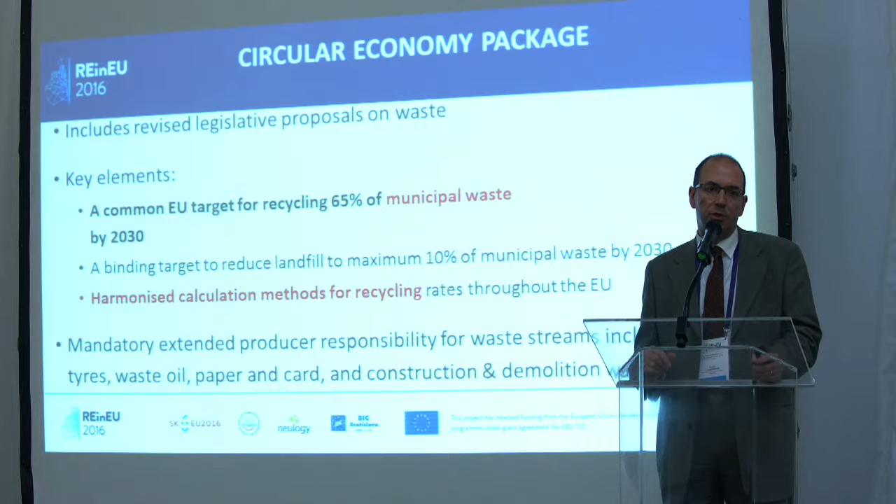Another important point is that there is an extended producer responsibility to make sure that you use your waste in a responsible way. That is relevant if you're talking about industrial symbiosis and use of waste across several industries. So that is the setting, that is the regulatory framework in which we operate.

So we have our raw material, which is limestone. Limestone is decarbonated with a 70% process emissions included, the rest is fuel emissions. We make clinker, and then from clinker they take the last step to cement. And then we add water and aggregates to come to concrete.

Concrete is actually a low carbon product which has about 10 to 15% of cement only. So please make that distinction between cement and concrete. Concrete then contributes to sustainable construction, to houses of today and tomorrow, and to infrastructure needs that are prevalent across the world. So that's a little bit the background of us.

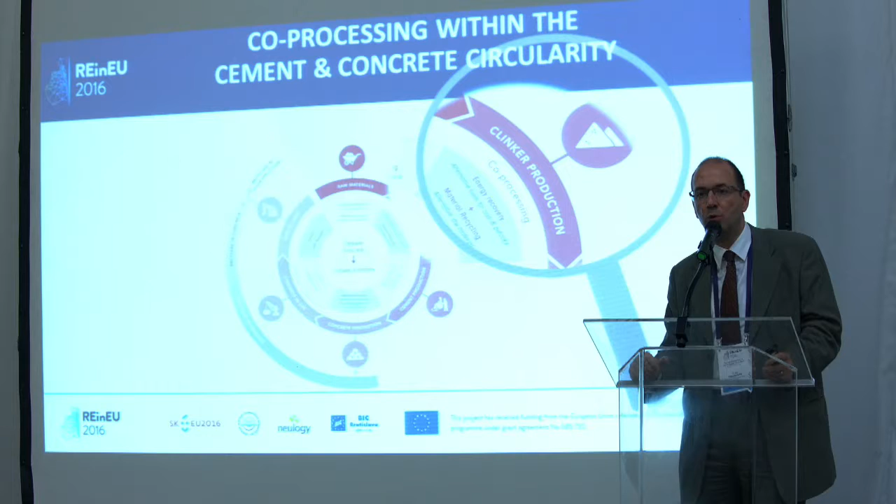What we're talking about today is mainly the clinker production process. As I said before, production of clinker is the part of the cement manufacturing process that is most CO2 intensive, most energy intensive. And that's basically what we're talking about today when we're talking about alternative fuel use.

We call it co-processing. What does it mean? It means that when you are manufacturing clinker in the cement manufacturing process, you normally use primary fuels, which is petcoke, oil, which is responsible for a lot of CO2 emissions in terms of fuels. We try to replace these primary fuels with what we call alternative fuels and alternative raw materials.

Now, how do we do that? Co-processing in the cement industry, and that's an important point I want to mention, is already recognized in guidelines of the European Commission. We're talking about a combination of energy recovery and material recycling. So you see the difference I make between energy recovery and recycling of materials, and that will be important for the rest of my presentation.

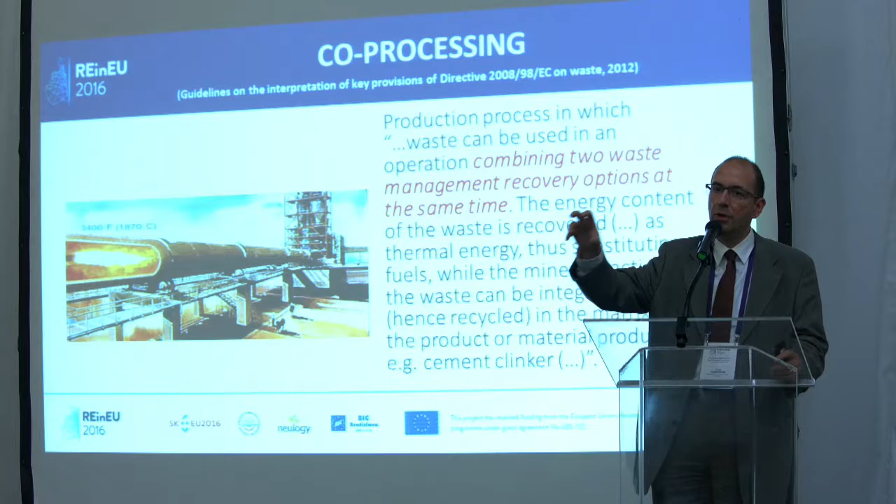But we always emphasize that co-processing in the cement sector means that we use waste from other industries, and we use this waste for both energy recovery and material recycling. This clarifies it a little bit on this slide.

When you look at alternative raw materials, you can have construction products that are used, demolition and construction waste from buildings. Part of the aggregates can be used in the cement sector again. We can use sands, slag from the steel sector, ashes, and we can recycle the material in these products to replace some of our primary raw materials.

The same is true for our alternative fuels. We have paints, we have plastics - you'll see that on the next slide when we go into detail. But the alternative fuels can replace the primary fuels, petcoke, oil, as discussed before. Part of that is also material recycling of some of the products. So you basically have both material recycling and energy recovery in the cement kiln, which means you reduce your recourse to primary raw materials.

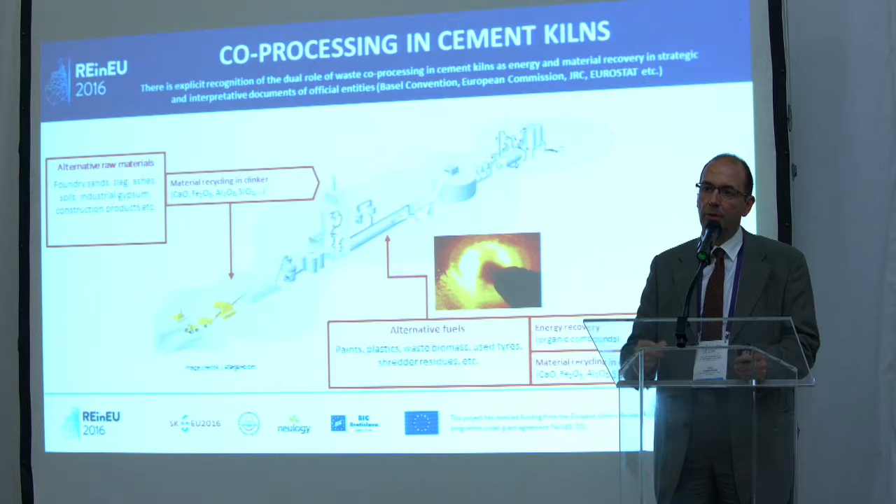So there is the energy efficiency and the resource efficiency more specifically. And in order to do that, you use products and energy from other sectors and other industries. And that's where the industrial symbiosis comes in. That's where the circular economy comes in.

When you look at the breakdown that we have in the cement sector, on the left side of the slide, you see that we still use around 59% of fossil fuels, so that's the primary fuels that we still use. But we have alternative fossil fuels for 36.7% and biomass for 4.3%. So we come at about 41% use of alternative fuels in the cement sector.

If you look at the vision and the way in which we use the alternative fuels, going further into the red part and the green part, you have different sources that we use. We use tires, we use solvents, we use animal waste, we use sewage sludge, impregnated saw dust - all these elements we use from other industries in our industry.

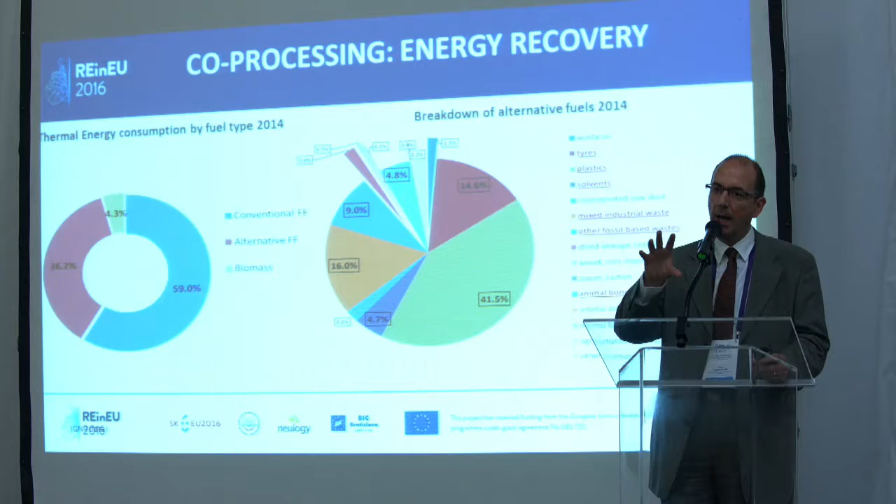Just for your information, when we're talking about biomass, it's about waste biomass - animal bone, animal meal that we use in our processes. That is what we call energy recovery. Remember, I was saying that the cement industry does both energy recovery and material recycling, so here we're talking about energy recovery.

When I'm talking about material recycling, you basically see that in 2014 we used a total of 145 million tons of raw materials, 5 million tons alternative raw materials, and then ashes for 2 million tons. So we have a substitution rate for raw materials of about 4.6%. So raw materials on the one hand, energy recovery on the other hand.

The footnote on that slide is also important because some people might say, but what is then the relationship between the cement industry and the normal incinerators? It's true that we always say there is a market for both, but in fact the cement industry has for a long time not been recognized and acknowledged as one of the potential intake sources for waste. And that's basically what we want to put forward.

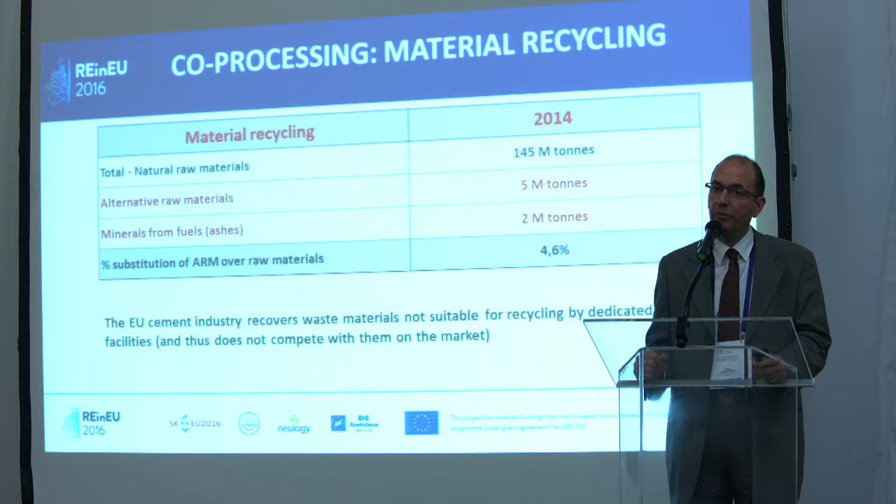When you talk in Europe about building additional incineration capacity, we are saying, well, before you decide that, look a little bit at the potential that is there for the cement sector, because we need these waste streams in order to make sure that we comply with our environmental requirements and with the obligation to reduce our CO2 emissions. I'll go to a few examples.

This is the refuse derived fuel or solid recovered fuel from municipal waste. That is a fuel that is produced when you shred the municipal solid waste. There is 12 million tons of that type of waste, and 5 million tons used by the cement plants. There is 7 million tons used by the incinerators, so waste to energy plants also use that type of waste.

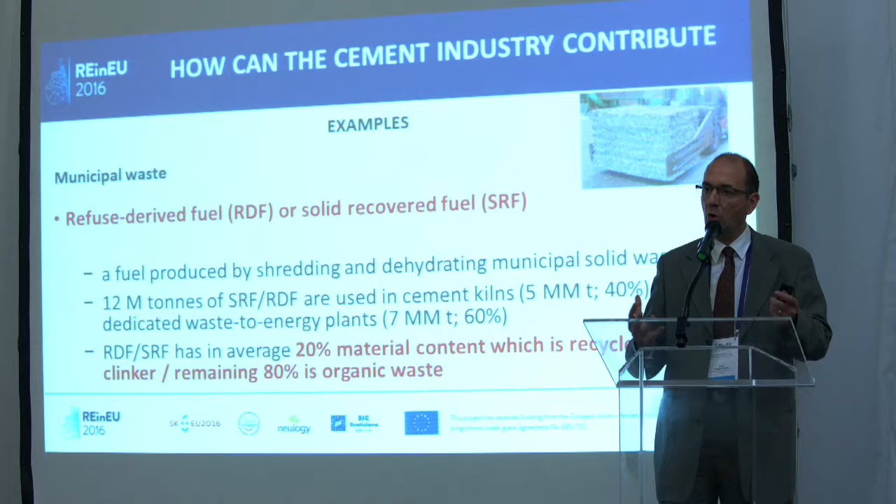That has a 20% material content which is recycled into the clinker. I think the important point there is to say that when we use material recycling, that material that we recycle completely goes into the end product. So we don't have any losses during the process - it is incorporated into the new product. That's where we basically talk about recycling of the product.

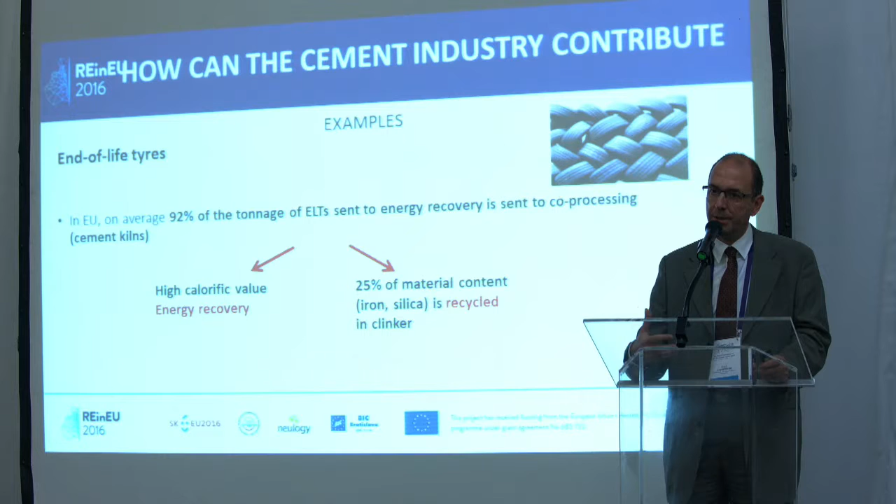Another example that may be closer to your daily activities is end-of-life tires. Around 92% of end-of-life tires are sent to recovery for co-processing in cement plants. That is actually one of the clearest examples of the combination of energy recovery and material recycling. Tires have a high calorific value, so you can recover the energy, and you also have some material content - more specifically iron and silica - that we need in the cement manufacturing process, which is recycled into the clinker. So we have both recovery of energy and material recycling.

We have emphasized this dual nature and dual capacity of co-processing very much because we know that member states in the European Union have an obligation to achieve recycling targets. What we are saying is that the material recycling part in the cement sector should be able to count towards the recycling targets of the member states. That is the discussion we currently have, also with the European Commission and with the member states - how can the material recycling in the cement sector be recognized in the recycling targets at national level? That's a discussion we have.

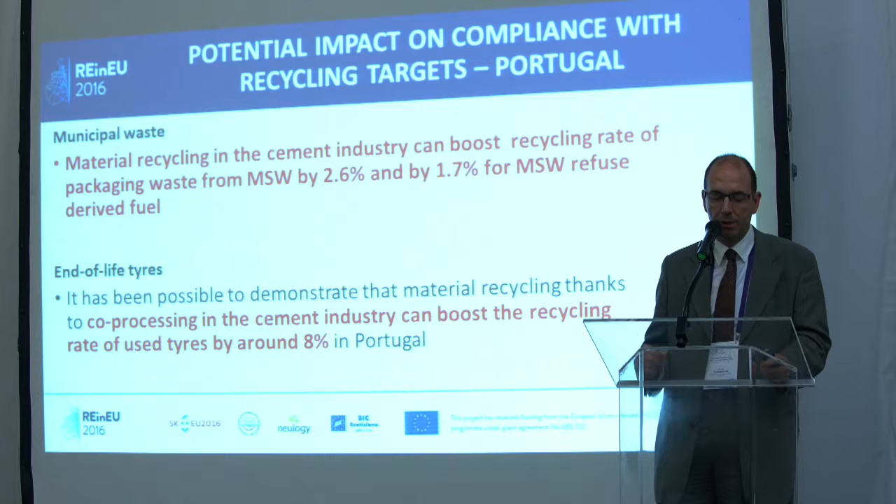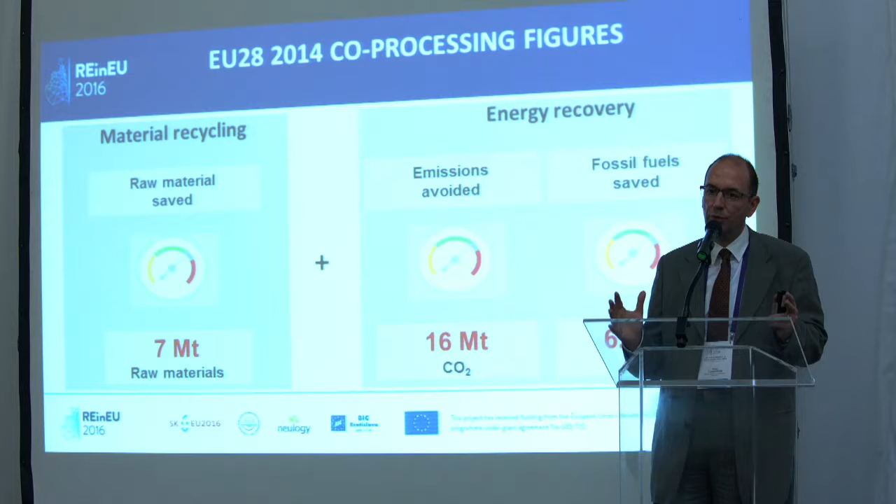You see two examples here on how we can boost the recycling targets. What does it mean for us? As I said before, material recycling means that we save primary raw materials - on an annual basis, we save about 7 million tons of raw materials. When you talk about energy recovery, we save about 6.5 million tons of coal, and we reduce our CO2 emissions by about 16 million tons per year. So that is our contribution to CO2 reduction and to less use of primary fuels.

If I have to end, and that was also a request for this presentation, what are now the policy recommendations that we would have? The first one I already addressed - acknowledge that the cement sector is there, that there is capacity available to take in waste from different waste streams. We have 160 cement kilns across Europe, so make sure this is used for recycling and recovery. What we also advocate for is a landfill ban for recoverable and recyclable waste.

It's clear that's on the agenda of the European Commission. It's not always easy to implement at national level, but landfill ban is high on our agenda because we need access to raw materials, we need access to waste as part of our raw materials.

That's a point in the discussion on the revision of the Waste Framework Directive and in the upcoming communication on waste to energy. So all this to say that we have a place in the circular economy, and there I would like to end my presentation. Thank you very much.

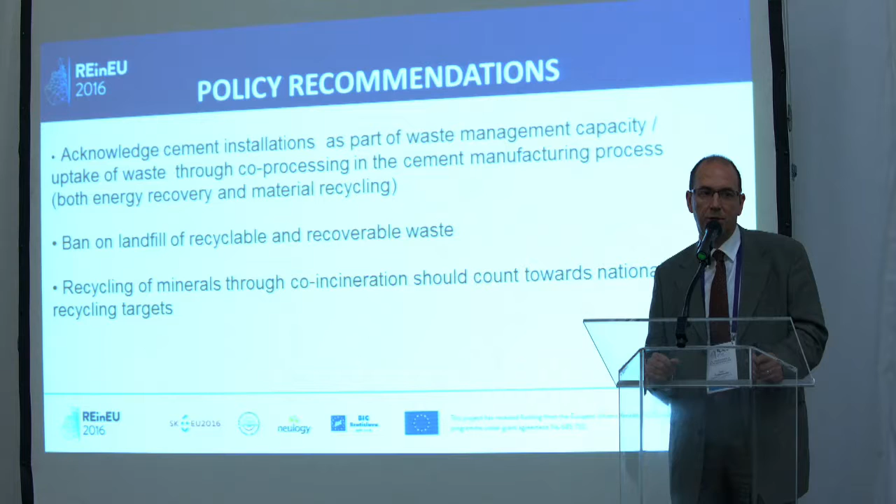Thank you, Koen, a lot for a very good presentation and overview. When waste becomes such an important input, it's also difficult again to define waste after all. Thank you very much.

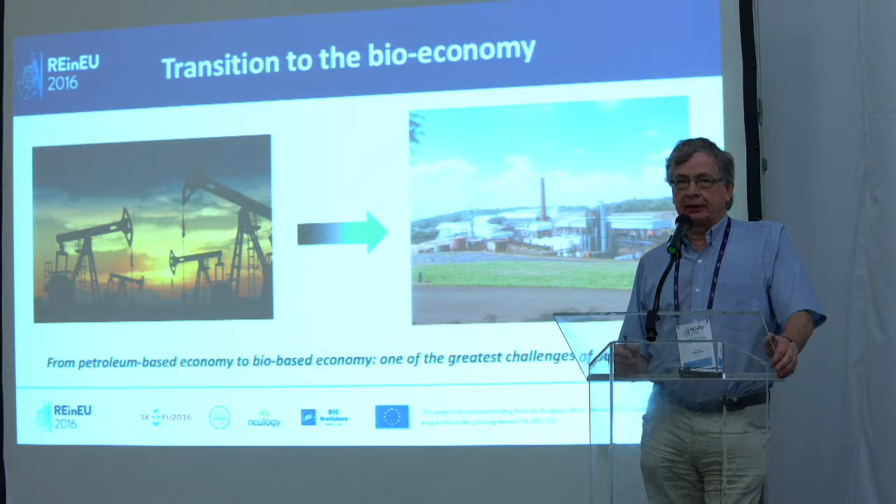Thank you. I would like to thank the organizers for the kind invitation to give this presentation, which will be concerned with the sustainable production of biofuels and bio-based chemicals with microbial cell factories. The transition from a petroleum-based economy to a bio-based economy is one of the greatest challenges of our times.

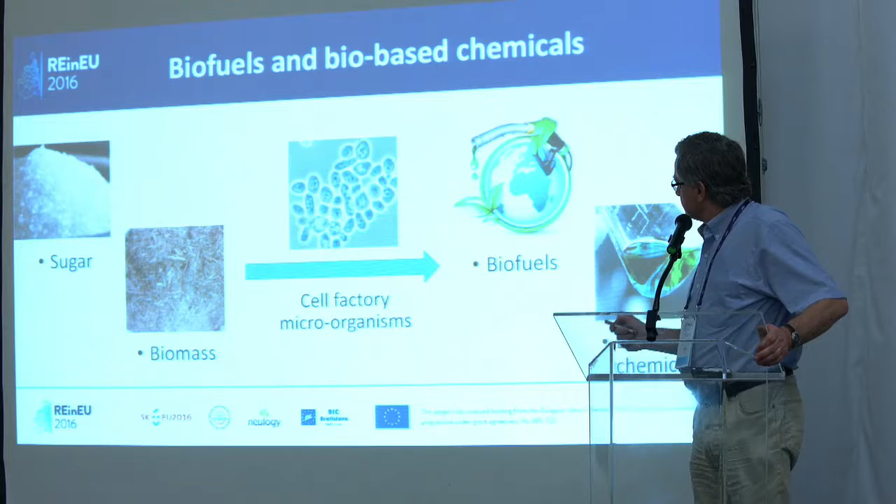To produce biofuels and bio-based chemicals with biomaterials, either sugar or biomass, we need microbial so-called cell factories, microorganisms that can convert with high productivity and high titer the sugary materials into biofuels or bio-based chemicals.

When we look at first generation bioethanol production, which is very active nowadays, we see huge bioethanol production in the United States using corn. In Europe, corn and wheat, but also sugar beets, for instance, are used for bioethanol production. In Brazil, sugarcane juice and molasses.

Molasses is a residue from sugar production. Most ethanol plants in Brazil produce both ethanol and sugar, and molasses is used for bioethanol production on a very large scale. In quite a few other countries, molasses, the residue of sugar production, is also used for first-generation bioethanol production. Other materials include cassava, and there are quite a few other foodstuffs used for bioethanol production.

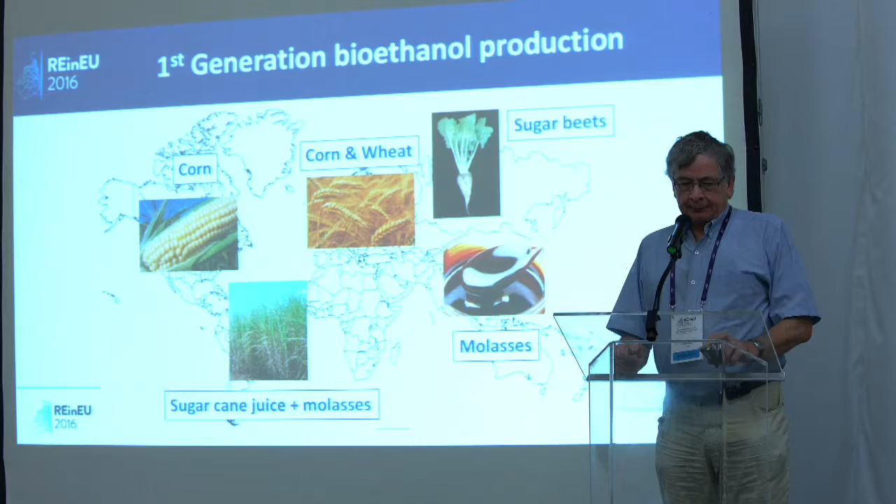But it would be much better if we could use so-called second-generation substrates for bioethanol production, either waste streams such as forest residues in northern areas, corn cob and corn stover, recycled paper, wheat straw, bagasse. Bagasse is the woody residue from sugarcane, available in huge quantities in Brazil. There are also empty fruit bunches from palm oil cultivation, and bioenergy crops, which are crops especially cultivated for biofuel production, though not yet at commercial scale.

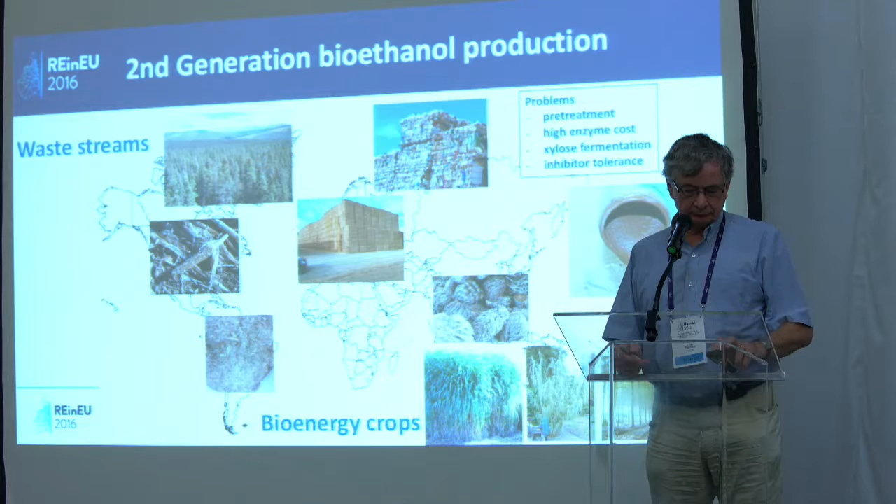In the FP7 NEMO project, we constructed the first industrial yeast strain with high xylose fermentation capacity and very high inhibitor tolerance, which could convert both glucose and xylose sugar in lignocellulose hydrolysate with high productivity into ethanol.

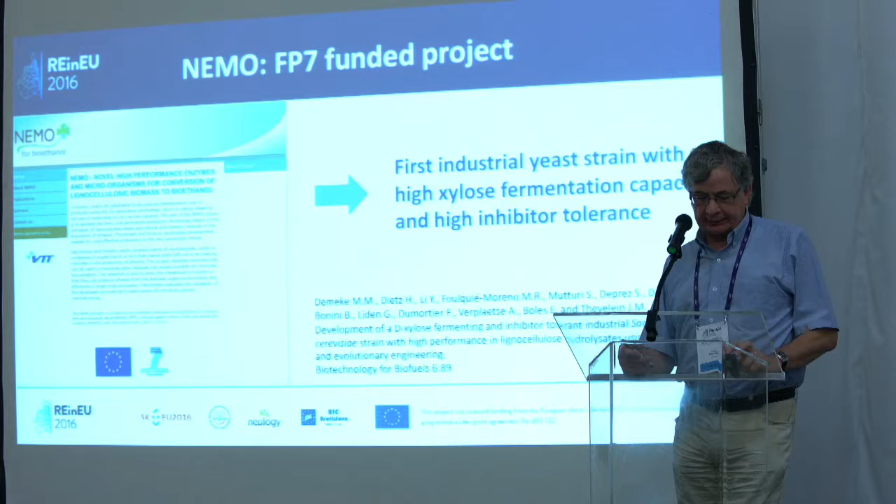Nowadays there are several of these so-called cellulosic yeast strains available, and we have moved from the demonstration stage into the industrial, commercial stage, where we have about 6 large-scale commercial bioethanol plants using second-generation substrates.

The first one was built in Italy, in Crescentino. Then there are 3 plants built in the United States, in Dakota, Kansas, and Iowa. And there are 2 plants in Brazil that work with bagasse, both of them. These plants are not as large as the first-generation plants, but still have capacities of about 100 million liters of ethanol per year, which is about 50% of a first-generation ethanol plant.

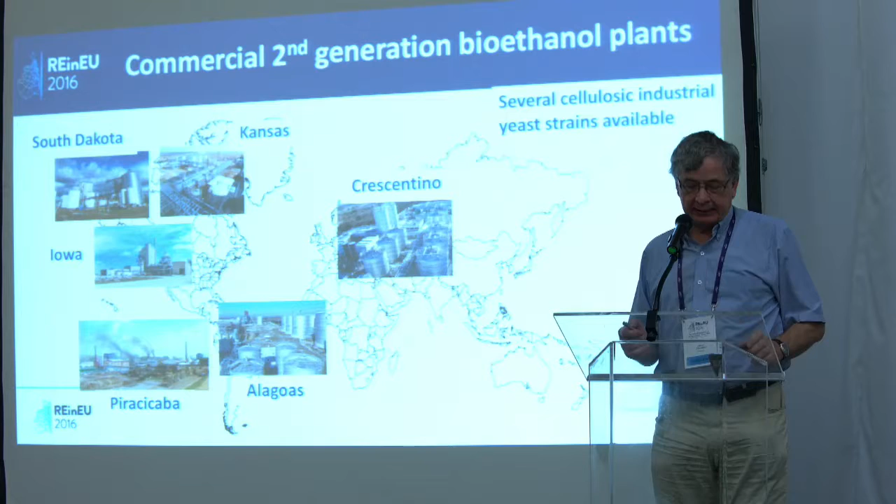With respect to current developments, two striking developments we see nowadays: plants like to combine first generation with second generation bioethanol production. For instance, in Brazil, sugarcane is used in most plants to produce both sugar and ethanol. The sugar production also results in molasses, the residue of sugar production, and bagasse is the woody material that remains from the sugarcane.

The bagasse is generally burned to produce electricity, but there's a large surplus of bagasse, so it's used for second generation bioethanol production. But as I told you, the lignocellulose hydrolysate has very high levels of inhibitors, which makes it difficult to obtain the required titer of ethanol and the required productivity.

That's actually why nowadays the plants mix molasses together with the bagasse. Molasses also has high inhibitor levels, but the inhibitors are different from those in the lignocellulose hydrolysate. So when you mix the two, you actually dilute the inhibitors from the two substrates. This gives rise to very profitable ethanol production, like the one in Piracicaba of Raízen, which is the most profitable second generation bioethanol production nowadays.

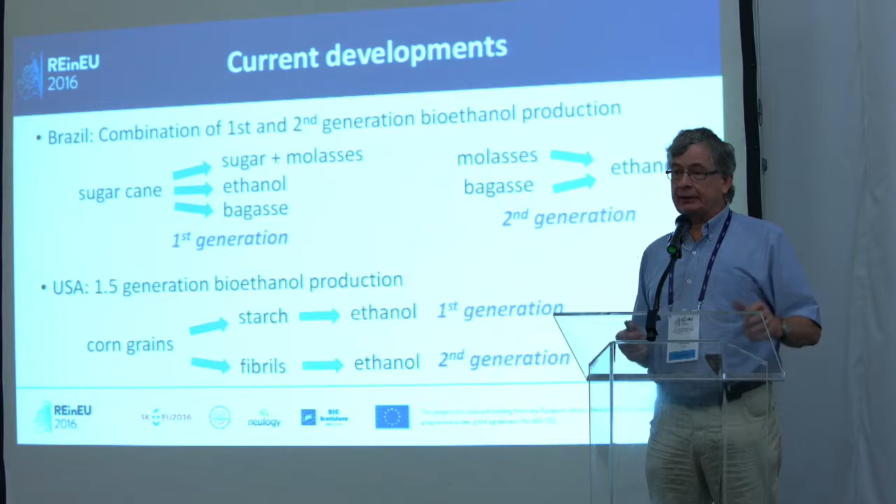Obviously this is quite profitable for the plants because, for instance, the distillation of the ethanol, which is quite expensive, can be used for both processes, first and second generation.

But all these plants suffer from children, or baby, problems. One of them, maybe rather unexpected, is the pre-treatment of the biomass. With a steam explosion, for instance, not only does it explode the lignocellulose material, but apparently also the equipment. It's highly corrosive, damaging to the equipment, so new pre-treatment methodologies have to be developed in order to make this really feasible at a commercial scale.

The enzyme cost: enzymes are used to hydrolyze the lignocellulose polymers into free sugars that the yeast can convert into ethanol. The enzyme cost is still about 20% of the ethanol cost, which is, of course, high.

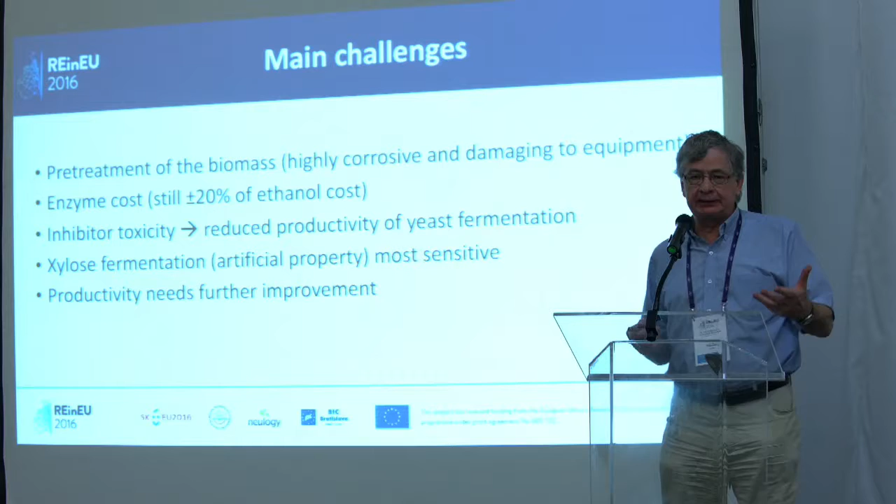The inhibitor toxicity is still an issue and reduces the productivity of the yeast fermentation, and thus also the productivity of the whole ethanol plant. What is quite striking is that the artificial property we have engineered into the yeast, being able to convert xylose into ethanol, is most sensitive to the inhibitors and stressful conditions in the plants and in the process. So the productivity needs further improvement.

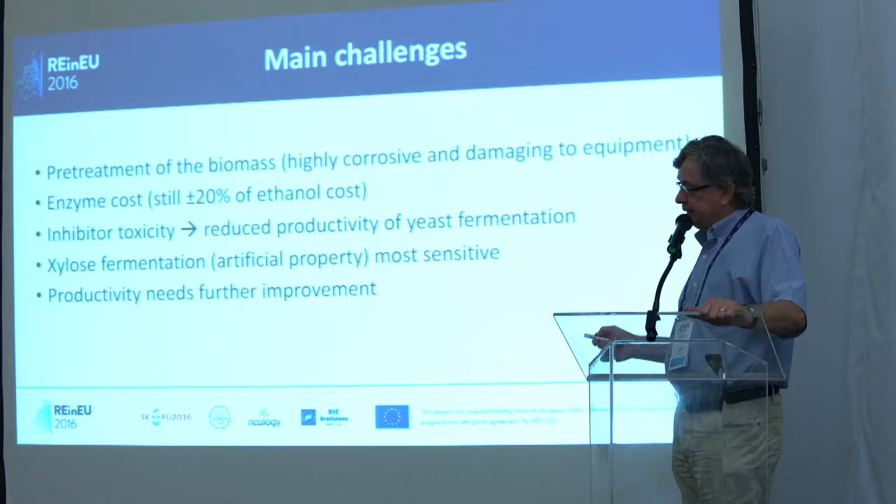With respect to bio-based chemicals, these are nowadays produced from sugar, also by cell factory microorganisms that have been engineered to produce these chemicals in high titers and high quantities. One of the easiest is lactic acid. Lactic acid is already produced by engineered yeast, rather than ethanol, and has been done commercially for more than 10-15 years. The lactic acid is used to make bioplastic, biodegradable plastic.

Also, succinic acid production has been realized with yeast - commercial production in large quantities of succinic acid, which can also be polymerized into biodegradable plastic.

Another alcohol, isobutanol, is a longer alcohol than ethanol, has a higher energy content, can be used to make jet biofuel, and also can be used as a platform chemical to make many other valuable chemicals for the chemical industry.

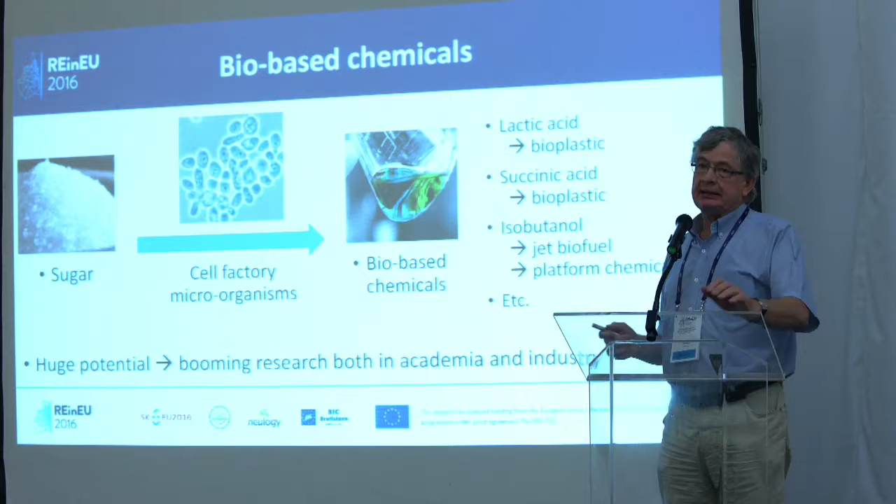This field of producing bio-based chemicals with cell factory microorganisms is actually booming. Both in academic research and in industry, there's a lot of work and development ongoing because everybody sees there's a huge potential in this industry.

But the challenges are also great. I mean, lactic acid was quite easy. Succinic acid is not so difficult. Isobutanol is already a little bit more difficult.

But the novel products that companies want to make require highly challenging metabolic engineering. The control and regulation of many metabolic pathways is not well understood, which makes it difficult to make cell factory organisms with high productivity and a high required product titer.

Many products that companies want to make are actually toxic for the microorganism. This is also true for ethanol, which is toxic to yeast, but lactic acid, succinic acid, and isobutanol are very toxic. The toxicity of these products is a big problem in cell-factory production.

Another issue is the stress tolerance of the microorganism. These microorganisms require a lot of metabolic engineering, which makes them weak. These artificial cell-factory organisms are much weaker than the natural microorganisms that come from nature into the system. That means there's a lot of problems with bacterial contamination in non-sterile large-scale production, because you cannot make biofuels or bio-based chemicals in large quantities in sterile conditions.

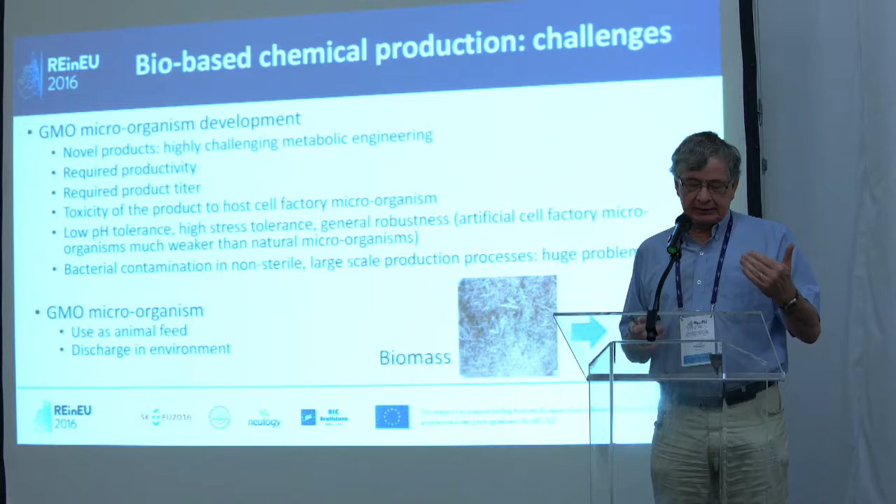As for bioethanol, it would be very nice if we could produce bio-based chemicals using biomass rather than pure sugar. But this is even more difficult, and especially the downstream processing, the isolation and purification of the bio-based chemicals from these lignocellulose hydrolysates, is a very challenging task.

Suggestions for policymakers: what we definitely need is more basic research on these cell-factory microorganisms, on how the metabolic pathways are regulated. We know the pathways, but how they are controlled and regulated is something where we have too little knowledge. Improvement of stress tolerance in these microorganisms is really crucial.

I'll give an example of what we would like to do: transfer stress tolerance traits from one species to another. It's quite striking if you look at yeast species. We all know Saccharomyces cerevisiae is the yeast that produces ethanol, but there are many other closely related yeast species.

Kluyveromyces marxianus has a very high thermotolerance, much higher than Saccharomyces cerevisiae. Zygosaccharomyces bailii has a very high acetic acid tolerance, much higher than Saccharomyces cerevisiae, and acetic acid is one of the main toxic inhibitors in lignocellulose hydrolysates. Zygosaccharomyces rouxii has a much higher osmotolerance.

So if we could find out why these closely related species actually have these very interesting, attractive traits, and transfer them to the Saccharomyces cerevisiae yeast used to make ethanol, that would be very, very interesting.

Another suggestion is that we need more support for the transfer of lab-scale results to pilot-scale conditions. Another important issue is the GMO situation.

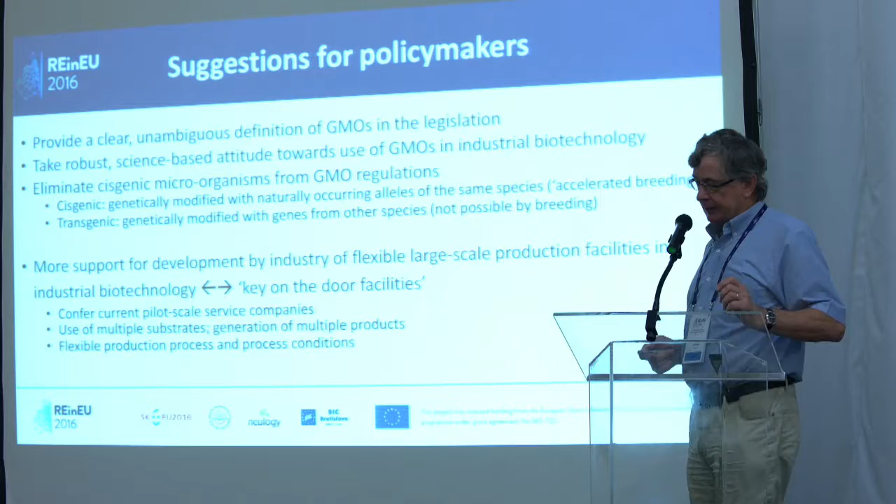What I think we also need is more support for the development by industry of flexible large-scale production facilities in industrial biotechnology, rather than the turn-key facilities that we have now. Similar to the pilot-scale service companies, which are much more flexible in the use of multiple substrates, generation of multiple products, and flexible production process and process conditions.

And then finally, my personal commitment in this story is that indeed I'm a professor at the University of Leuven and department director of the VIB, but I'm also the scientific founder of a startup company.

Global Yeast is a Brazilian-Belgian startup company financed by Brazilian and Belgian VC funds, with headquarters in Rio de Janeiro for business development and very good connections to the Brazilian bioethanol industry. The research and development site is in my laboratory now, but we will move next year to the bioincubator. The mission of the company is to develop superior industrial yeast strains for the production of bioethanol with first and second generation substrates, and the production also of bio-based chemicals. We have in total now 14 people in the company. Finally, I'd like to thank you for your attention.

Thank you very much, Johan. It's interesting to see that you have one leg in a very fast-moving research field and another one in an industry that depends on bulk and high investment costs, where you may have 20 years of repayment before a successful manufacturing. So when do you take on board the new technology and build a new factory? So when do we have the circular economy?

Okay, next speaker now. I would like to present Dr. Witold Kawalek, who is a mathematician and mining engineer, and lecturer and research worker in the Faculty of Geoengineering, Mining and Geology at the Wrocław University of Science and Technology in Poland. Your main fields of interest are mathematical modeling of systems for the mining industry, and you also write something I never heard before. I heard about fuzzy logic, but here you write that you like to use fuzzy numbers. So let's see if we see any fuzzy numbers in your presentation. Okay, please. Thank you.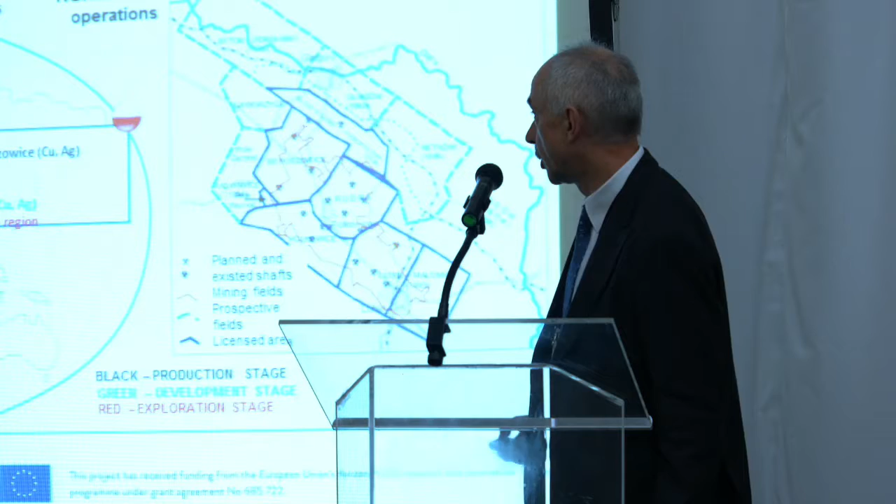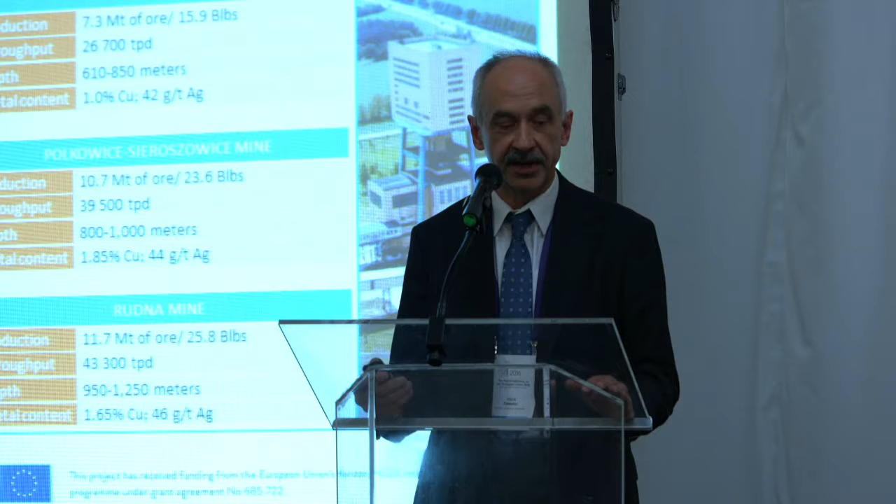So, a large company. Some key facts - you can read several numbers that prove it is really a big company. Number of staff, really deep mines, difficult geology, means that mining there is difficult, and also processing of the ore is difficult. What is very important, this is a giant energy consumer - 2.6 terawatt hours per annum, meaning up to 2% of the total electric energy consumption of Poland. So it is a giant energy consumer. Any reduction of this means a lot of energy saved.

Some few words about the mining technology, because probably you are not aware of this. You can see a map of mining developments, belt conveyors, large lines of belt conveyors that transport copper ore. The copper is blasted, then transported by cars, by trucks, to belt conveyors, then to the shafts up and processed. And as you can see, the ore is delivered in big lumps.

Those lumps have to be crushed, then milled. Here you can see fine particles that are flotated. However, these three processes depend on the ore that is supplied to the processing plant, and various types of ore require a little bit different activities, different settings of those machines. It would be better for the processing plant to look exactly what ore is being supplied to them.

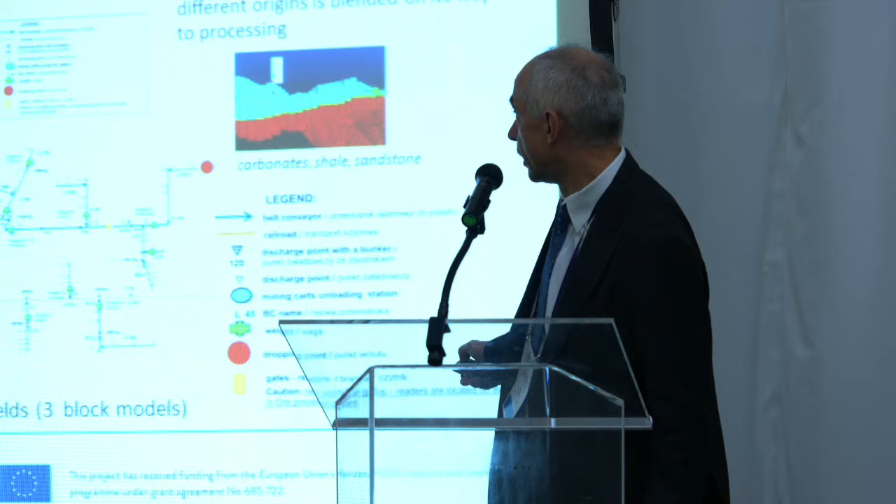However, as you can see, it is not easy, because the general lithology of ore contains carbonates, shale, and sandstone, and changes from one mining field to another, those digital blocks show the differences. This material, even known in the mining field, being loaded on a conveyor belt, is then mixed or blended with another material, and finally there is a mixture difficult to be distinguished. This is the input of the DESIRE project, as mentioned before.

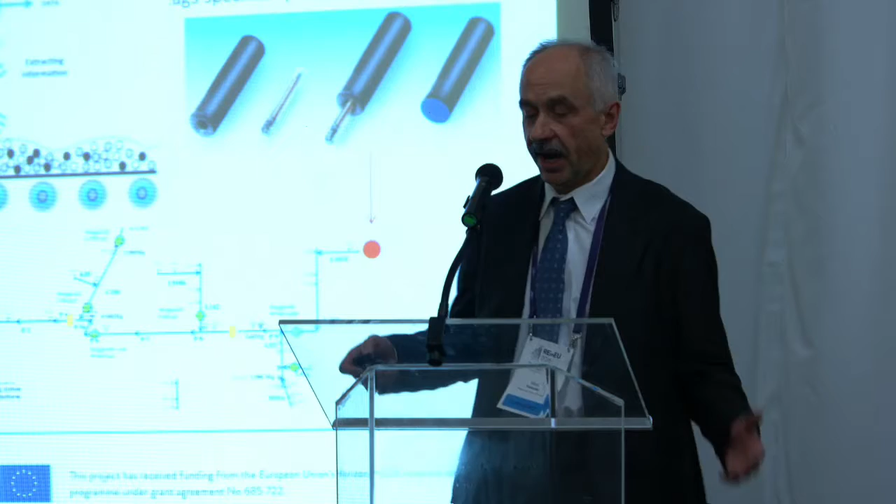Why not add information to the raw material stream in such a way that this stream can say something about itself? If we put small tags or sensors onto the stream, at the place where the ore is loaded, then after transport those tags can be read, information from them recalculated, and we should know something more. The technology is provided by the DESIRE partners to KGHM, the special tags, the readers, and obviously it can work only if we have...

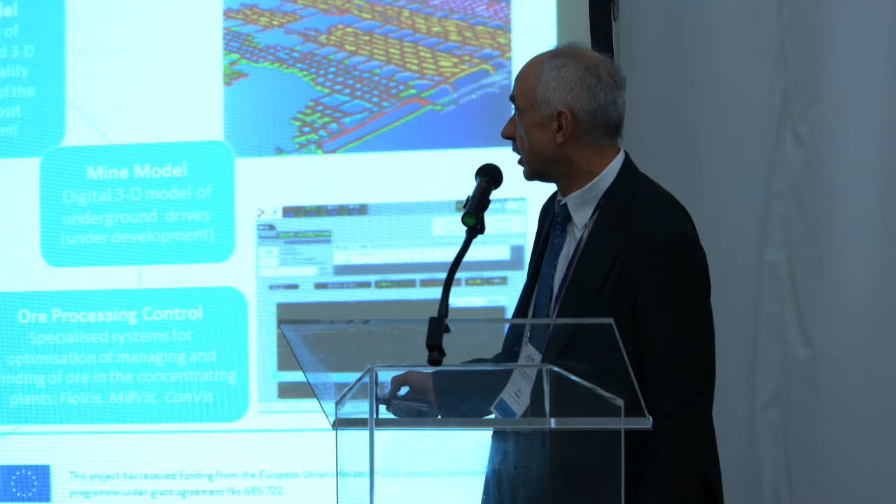Sufficient information communication technology environment, and there is in KGHM a digital ore body model, a mine plan, which provides information about the consecutive mine advances, the mine model, which numbers and identifies places from where the ore is being mined, belt conveyor control, which gives information about the running of conveyors, and this information, taken together and processed, should provide the ore processing control with more accurate data about the ore being delivered there.

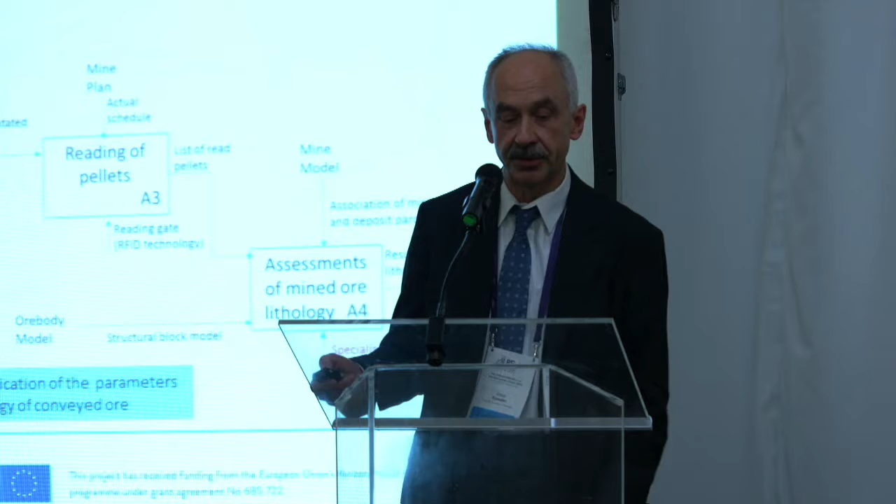The workflow of the proposed and being developed DESIRE process analyzer technology solution: from preparing the pellets or sensors, annotating them, then after transport reading and processing the information to get the results. Again, the valuable input of DESIRE partners is processing of big data. Cloud computing is used for this.

Sorry, can you run this?

Here you can see the simulation model of flow of material. The small X which arrives on the conveyor belt represents the tag or sensor which was put in at the loading point and then transported with the ore up to the shaft. Here you can see how the bulk material behaves in the ore bunkers, for instance here. So you can see that blending is not very easy.

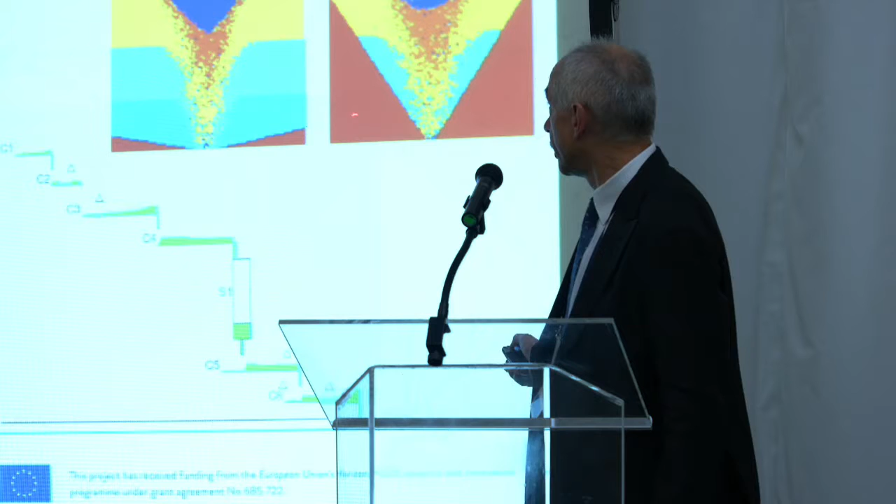These simulation models I used for supplying the assessment. So this was about getting the knowledge of the material, but the large belt conveyor system also consumes a lot of energy, and the energy can also be saved.

There are some SCADA systems already implemented in KGHM, a lot of sensors that get information from machinery equipment, and if this information is taken, the diagnostic signals, taken, smoothed and read properly, they provide information about a fault which can cause a breakdown. After repair, the diagnostic signal goes back to the proper stage.

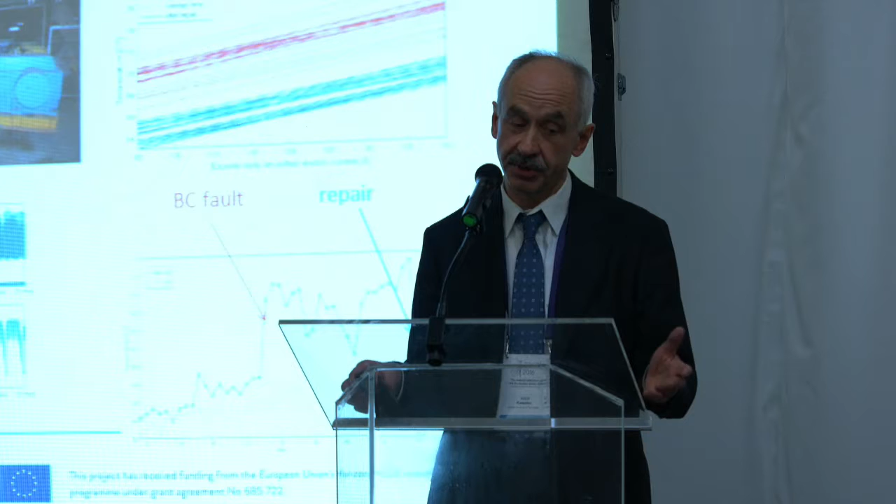Here you can see the signals from good, bad and repaired machinery. All this leads us to condition-based versus the previous resource-driven maintenance, decreasing breakdown time, decreasing idle work of conveyors.

Which obviously means only wasting energy. Another solution to the belt conveyor system is replacement of energy-consuming elements like belts and idlers with more efficient ones.

This is the old solution, modernized. And this is the output, so you can see this is the comparison of resistance to motion, which means consumed energy. Tests were made in situ in the underground mine in very tough conditions, which are really difficult to operate in.

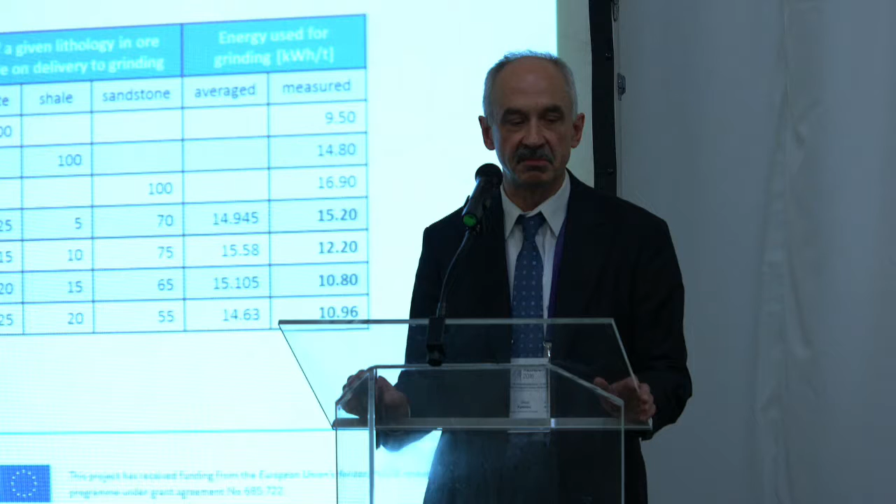Next impact, maybe even more important: not only can we save energy, but also while supplying the processing plant with recognized ore, and better tuning the ore beneficiation processes like grinding, milling, and flotation, we can increase metal recovery. So it means we can get more from the natural resources.

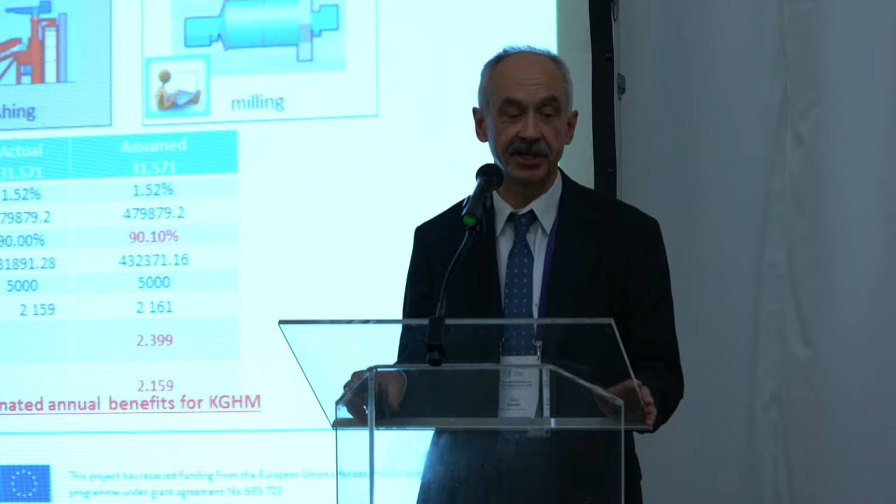Also a very conservative estimation tells that even increasing the recovery from 90 to 90.1% gives more than 2 million euros in value of metal earned by KGHM, but it also means tons of copper supplied to the industry instead of being poured onto the tailing pond.

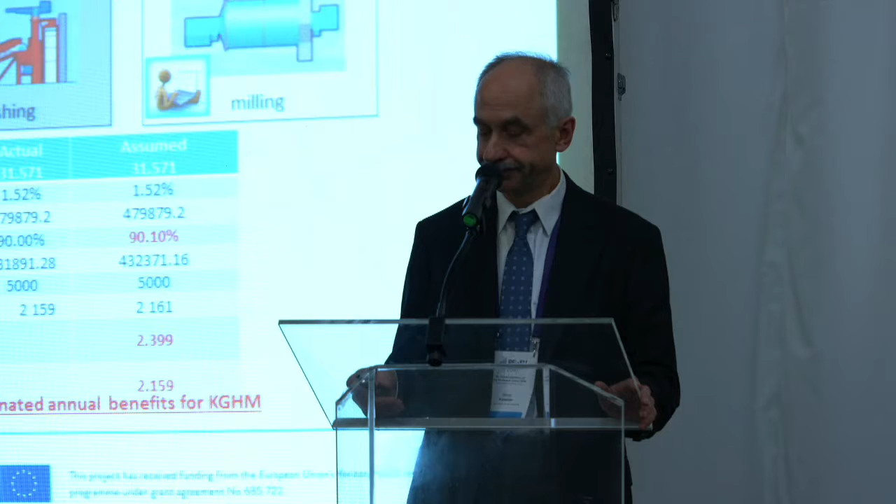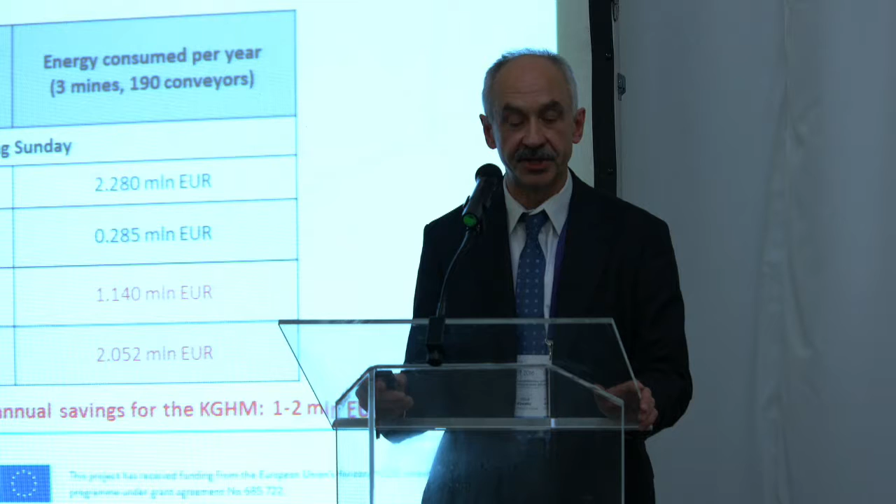Large belt conveyor transportation systems can also save energy by avoiding idle time, as was taught, and also by the replacement of standard equipment into more energy efficient equipment. Just looking at one branch of a single mine, if we replace the old belts and idlers with new ones, taking into account the output and average number of hours, we can save a big amount of energy and money spent on energy. This is for this transportation branch only, and for the whole KGHM, here are the potential savings.

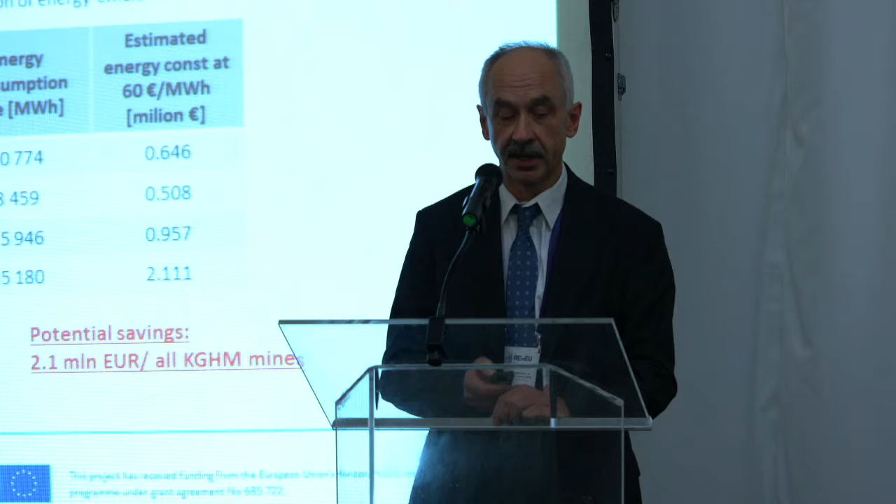This project is being run now. What is at the moment being done is cloud-based big data processing of data streams. In situ experiments are being prepared and will soon start. A comprehensive workflow procedure takes information from several already existing systems and adds some new ones to provide information on the copper ore. The algorithms for efficiency estimation and fault detection are under development, but some of them have already been developed, checked against standard policy, and proved to be successful.

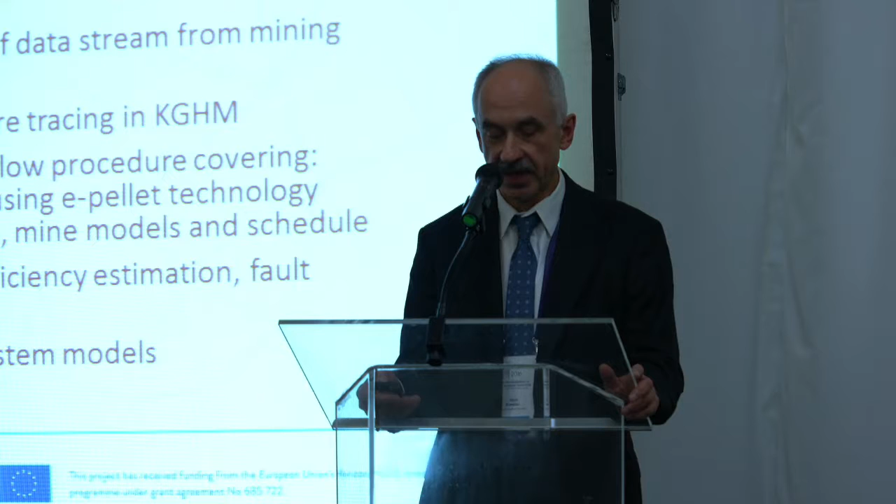Closing remarks. These presented results, achieved and expected, have been possible due to the DISIRE project, which helped the non-ferrous industry in Poland to be supplied with solutions already developed in Sweden, Italy and Israel, with specialists working together. There is strong cooperation between the partners in the project. The project should finish with proposals tested in industrial conditions. Obviously, next steps depend on the company, but there is a visible successful solution for the company to reduce energy consumption and increase metal recovery. Thank you.

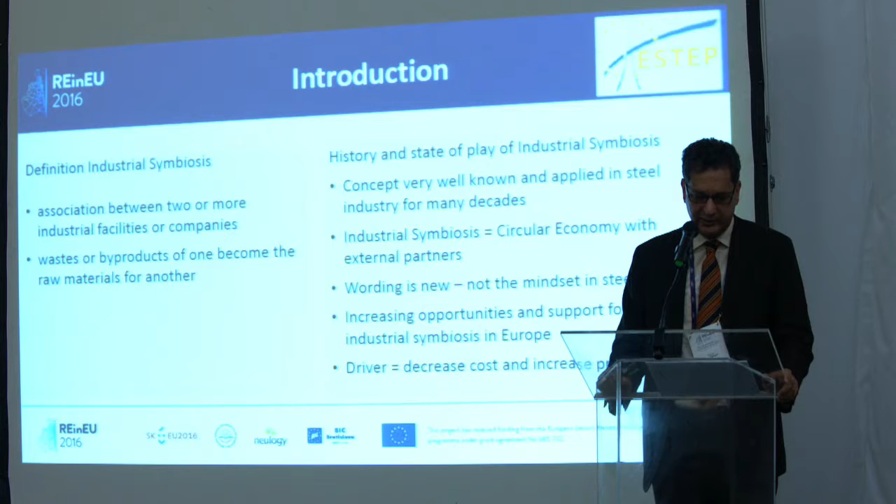Okay, back to the topic: industrial symbiosis. The basic definition, as we understand it, is basically an association between two facilities or two companies or two industries, where the waste or byproduct from one could be of use to another. This concept is very well known within the steel industry. It gives us a number of opportunities. Basically, we recycle most of the process, and we'll see in the follow-on slides.

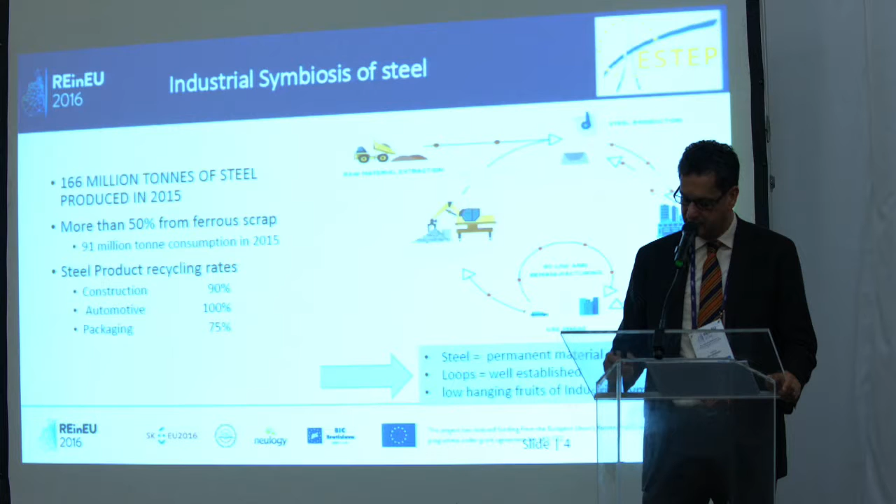The loop is well established, but we're still working on how we can make more use of the scrap and not just take it back into the chain.

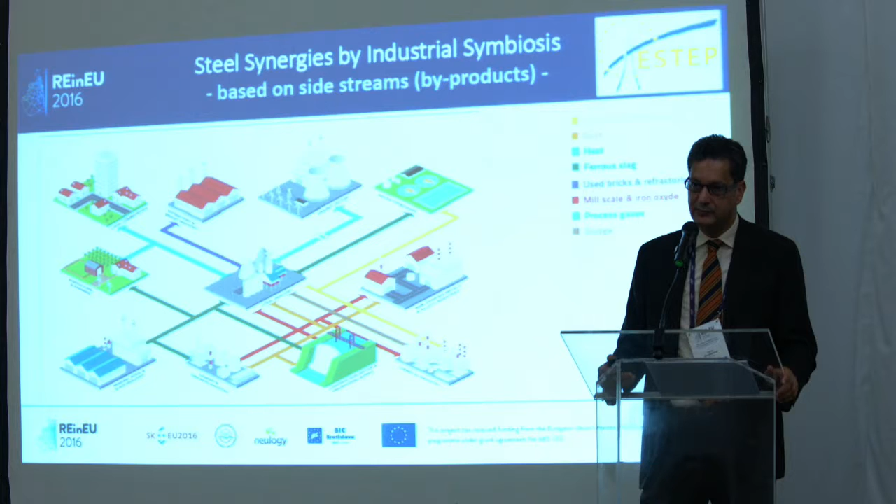As we can see in this figure, the steel industry is at the heart of other industries. Basically, we feed all the byproducts to other industries - could be water treatment, construction, cement - and it's very well linked. It depends on the industry: some you can get only one byproduct, others you might get a combination, maybe two or even three. So the key point is it's well linked with other industries. That's on a high level.

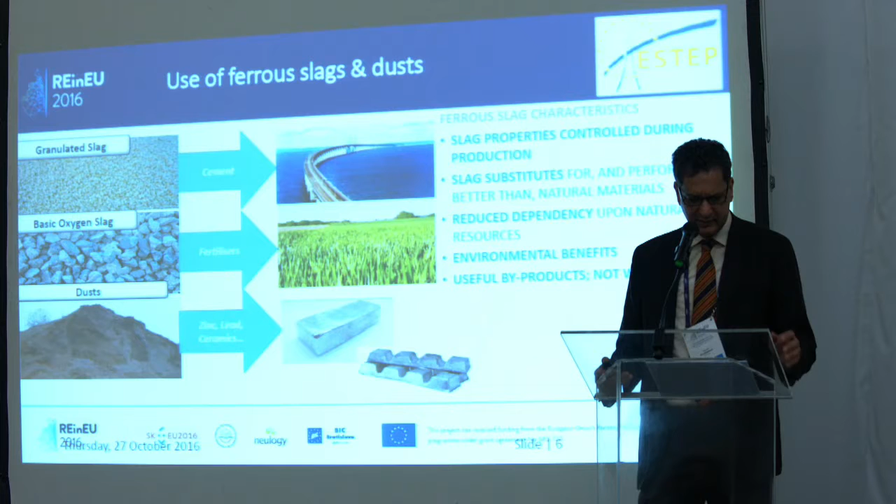On specific examples, we can see the granulated slag feeds into cement, then becoming an infrastructure, in this case a bridge or a building. Same with the basic oxygen slags, leading into fertilizers - sometimes we can't imagine this is possible. And the same for dust. So a number of byproducts lead or feed into other industries.

It's not the whole steel industry, just one example. And the reason for the 6% - it's not technical, it can be recycled, it's just not a cost-effective way of doing it at this moment in time.

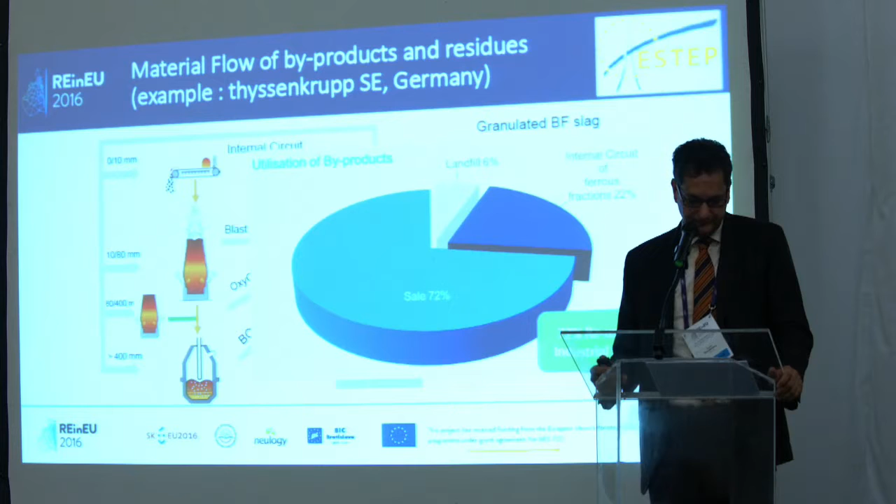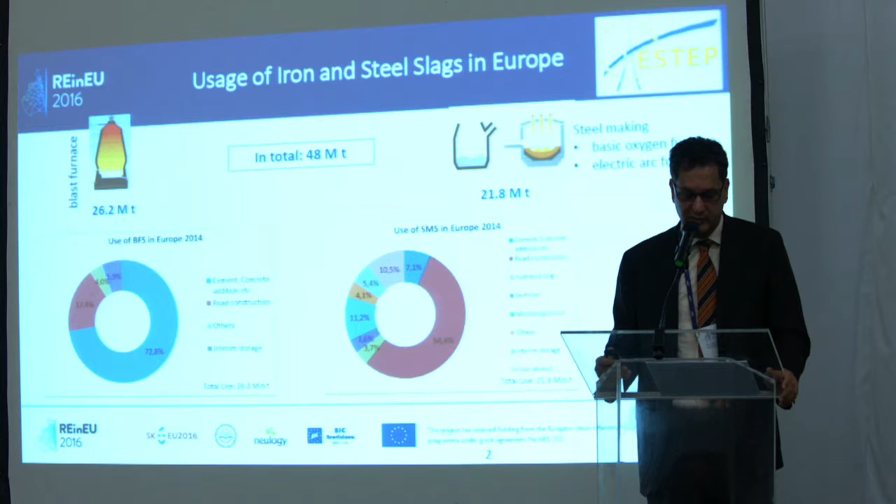Again, as I mentioned earlier, it's not a technical challenge, it's just not yet a cost-effective way of doing it. But you can see the difference between the two methods - the blast furnace is 100%.

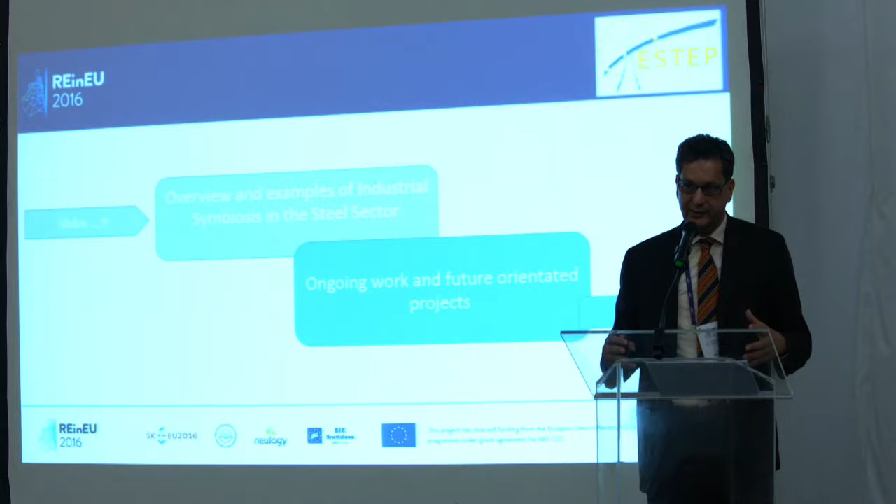So far we've seen an overview of how the steel industry is well embedded into other sectors and the rate of recycling. However, you can say the loop is well established, but the journey for us isn't over - we're still getting on with some work. What can we do with the recycling? I've got three projects to mention.

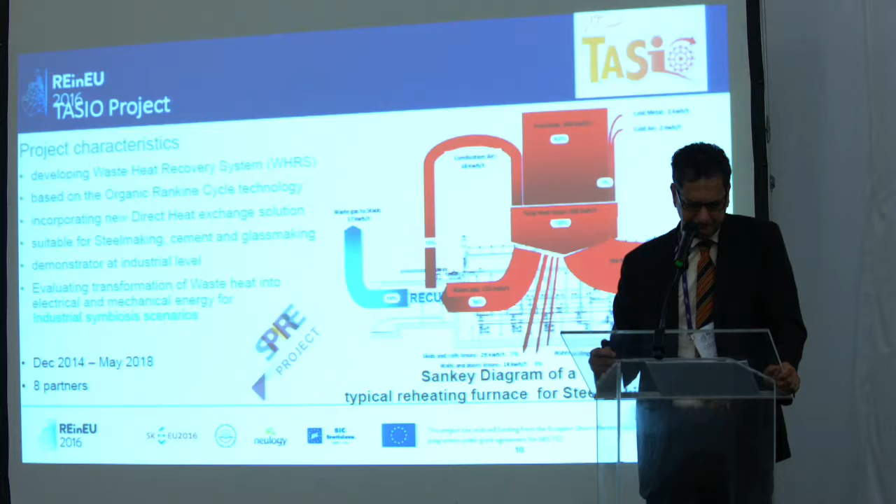The point here is those two technologies we've just seen are not just specific to steel - they can also be used in other industries, like chemical, transport, food, or the cement industry. Although we're focusing on a couple of outputs like fuel and fertilizers, there's no reason why we cannot explore other outputs. It's only the focus and remit of this project, but once we get the technology, we can explore other possibilities, and the technology can also be transferred to other sectors.

Coming to the regulations, this area is well regulated, and there are legislations for this purpose, for the byproduct. The key message here from the steel sector is we should not underestimate the effort that has been put in to get to the point where we are, in terms of almost closing the loop. There are a number of legislations, and more still to come, but we're looking to carry on with this successful story with supportive and non-contradicting regulatory frameworks. What we would like is a framework that will enable and help this effort, make it more of a success, and also transfer it to other sectors. We should not underestimate all the work that has been done so far.

To summarize, this concept is well established within the steel sector. We've got the loop closed, with a very tiny bit that goes into landfill, and that's not for technical reasons but more about cost effectiveness. More than 70%, in fact at this moment about 72%, of our byproducts get used by other industries, and we feed a number of them. It's like a web, and we are somewhere in the middle. We play a key role there. We're looking for legislations that will keep this good and successful story going, and help it establish itself across Europe rather than just one sector.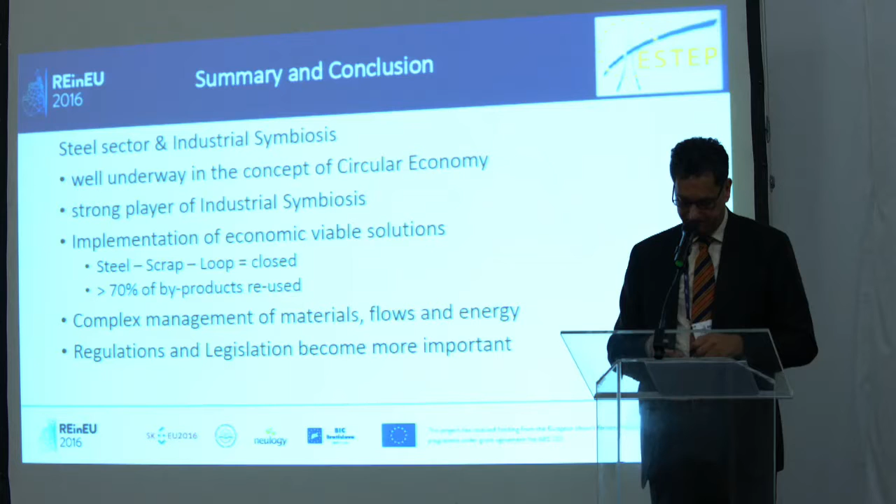Steel and all that almost made me thirsty hearing about it. It's also like a modern drink. Anyway, time flies when one has fun.

We have covered a lot of different raw materials and circular streams, but I feel I need to complement the picture a bit with the circular bioeconomy and the forest-based sector. In Europe, we are harvesting and using about 400 million cubic meters of wood each year, about half a ton per EU citizen. This wood is used for everything from chairs to biofuels, construction materials, and paper. The EU has a world record in recycling paper. Recycled paper is the most common recycled product, with a recycling frequency over 70%, close to the theoretical maximum. So on the paper side, the circular economy is already there, so to speak.

On the other part of our sector, more on solid wood or construction materials, the recycling frequency is almost zero. That's a shame, and there is a lot still to do. Also, speaking of how much raw material we have, one should know that more wood was harvested in 2007, before the financial crisis, than today, and there's no prognosis that we will harvest more wood in the future. So sometimes I think in Europe we've focused very much on the lack of raw material in all aspects, and not so much on what we actually can do.